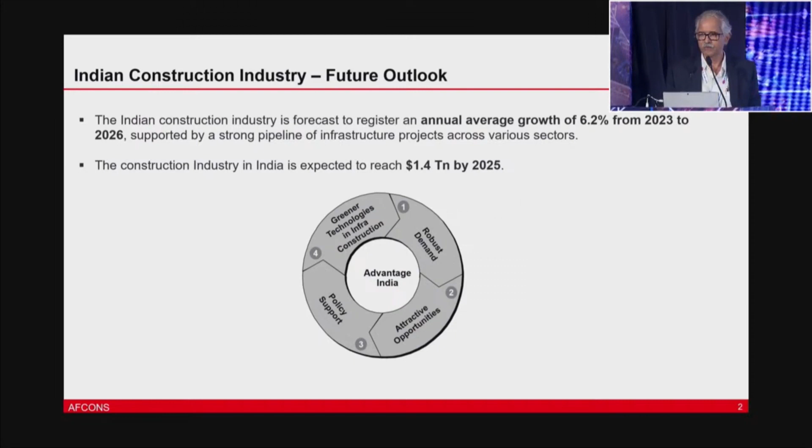What are the challenges of construction industries? First is project estimation itself. In our experience, government bids are coming so fast, and the window given is as short as possible, and you're supposed to respond in that. So estimation has to be accurate as well as speedy.

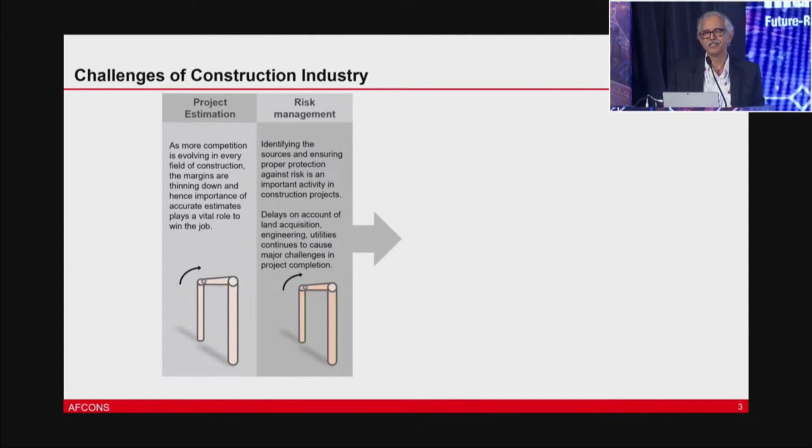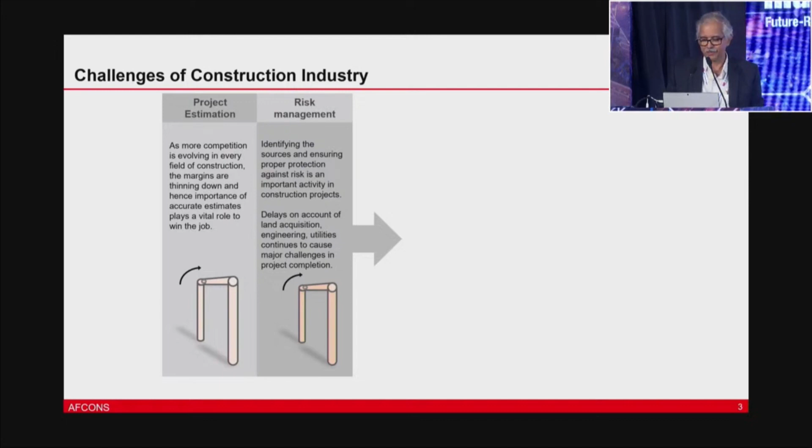There could be many risks, geographical risks. In India, I've seen that risk of land itself is not given, and clearance of the land is put on the contractor's head. Recently I saw one project, I don't want to name it, where clearance was given to us to do, and our people are struggling for the last one year. I don't know what the timeline was given in the detailed project report.

Resource management - all of us know it's the most important thing, and these days all construction companies, including real estate, face the same issue: labor is not available. Getting resources has become the most difficult thing for construction companies these days.

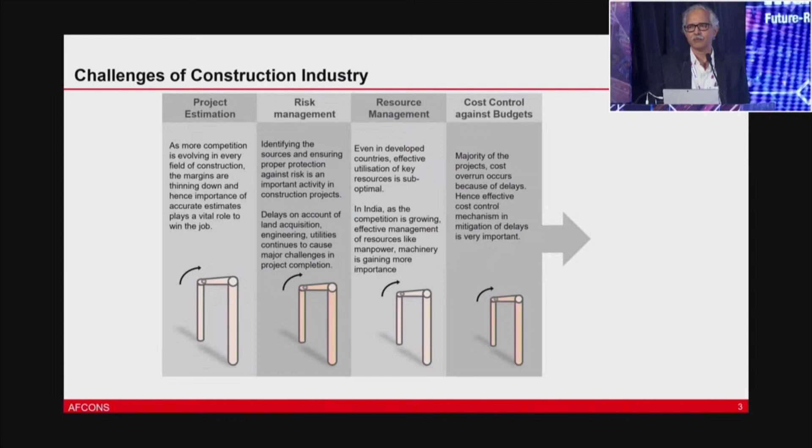Cost control against budgets - you have to be really on top of the budgets. I've been researching many construction companies, and to be frank, I have not come to a satisfactory answer, including AFCONS, on how you control your budgets. I would like to learn from international companies; although I've worked there, even there I'm afraid I haven't got a real answer on how we control budgets using software tools.

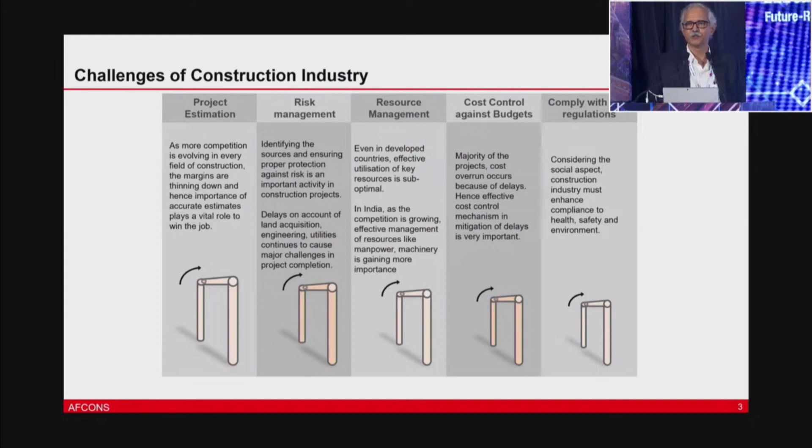I give this open challenge to discuss with me on this particular topic. Comply with HSE regulations - all of us are aware what kind of HSE regulations are there, and you have to comply with them. Most international companies I've seen first start their presentations with the fatalities of their own companies.

Anyway, to circumvent challenges in the construction industry, I came across this benchmark diagram for myself through McKinsey, where in 2016 a particular article was written emphasizing how BIM is going to play an important role, not for real estate but for infrastructure industry, and how BIM is connected with dotted or straight lines with all the systems in the organization, including ERP.

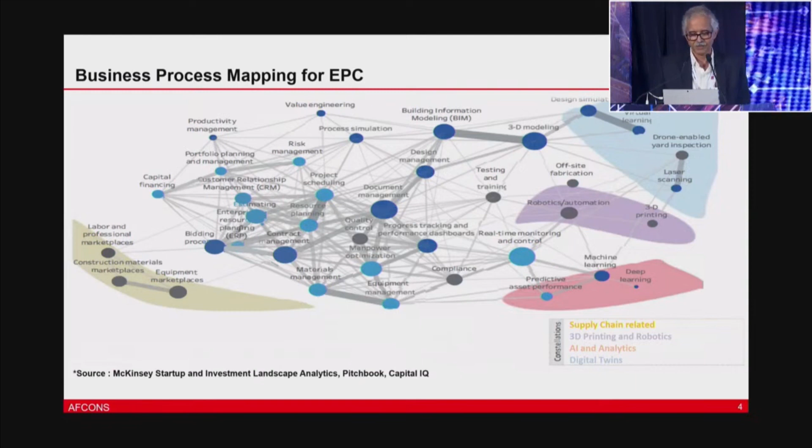We worked on this particular diagram for so many years - it took a very long time. We came up with our own support system as well as front-end systems for digitization, where we made SAP our main lifeline system for ERP. Now it is S/4HANA RISE.

And BIM - BIM is an initiative which started just about 1.5 years back, and we've now made it a way of working for the company, where a case study will be presented.

AFCONS won the MAKE Award for most innovative knowledge enterprise, winning the award for 7 consecutive years.

Second, we gave more emphasis on the cost control side, on IoT-based devices, where we put in more than 2,000 major equipments with IoT sensors primarily for governing our fuel theft. It's a case study of how fuel can be saved using our own call center established at Nagpur, and how they monitor using the sensors - that could be another case study for you to take up.

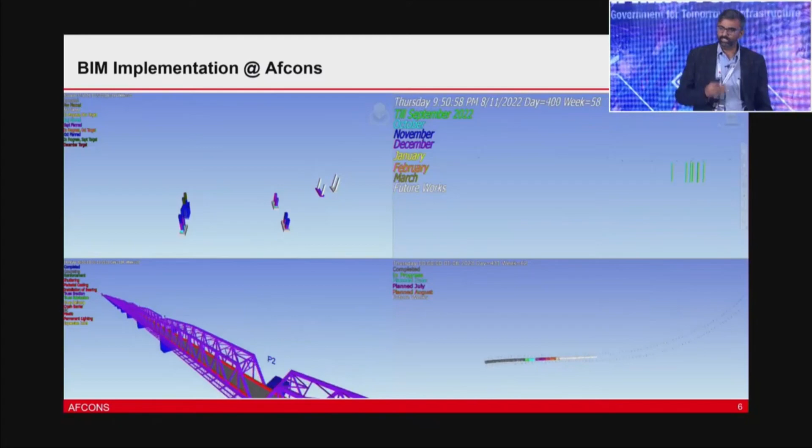So we are just showcasing 4 cases here in 4 quadrants. We are not talking about 2D to 3D, which is common, or 3D quantity extraction, or clash detection, which is a regular routine process.

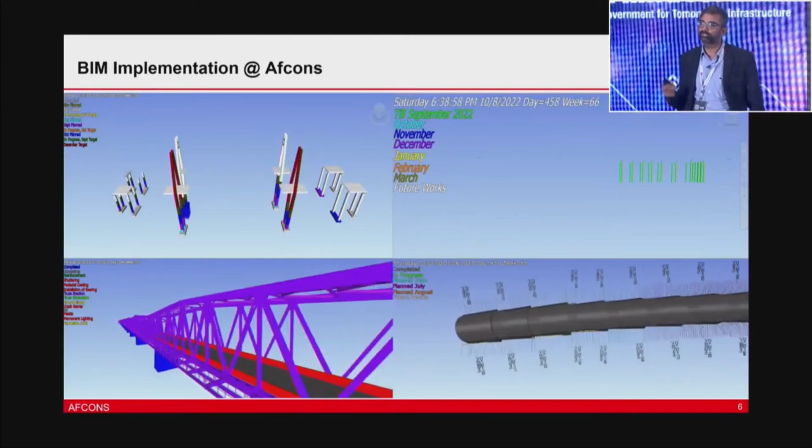We are focusing on decision-making processes plus contract administration. So from 4D, design analysis is being done. Then we go to the next level where construction methodology and method statement analysis is taken into account, lift wise, how the construction is going to happen, and validation of the construction method statement.

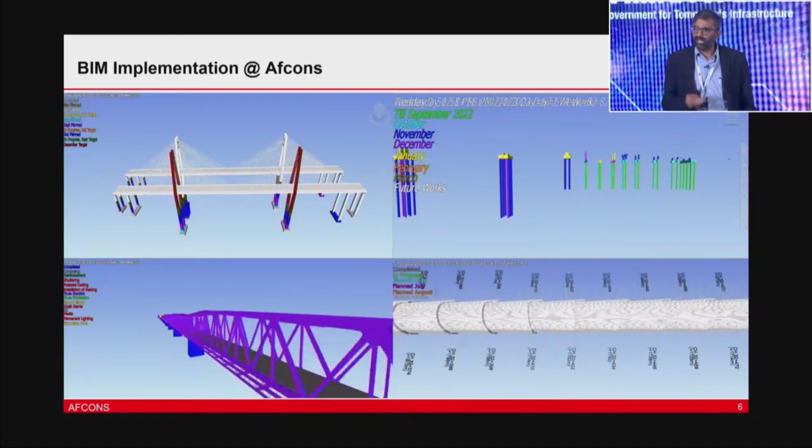Then the major focus is on progress monitoring and catching up on delays. In this particular section, what we are doing is the colors you are seeing are nothing but the realistic, dynamic, expected completion dates of those lifts of those pylons.

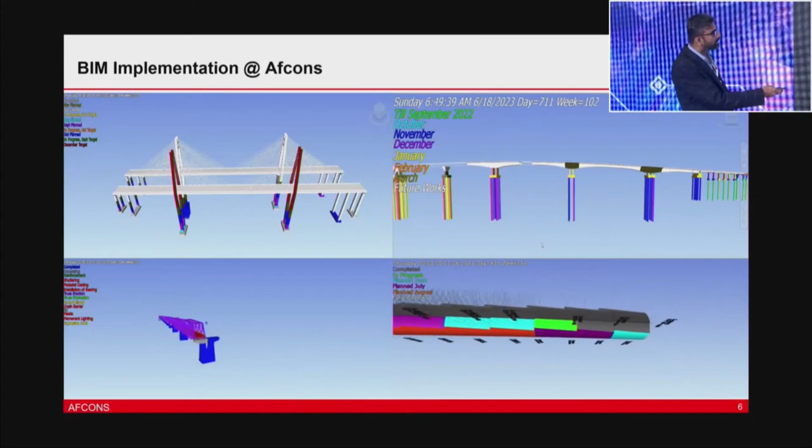You can see the months mentioned here. It's a 6-month look-ahead plan already being reflected on the screen. This is a Male project connecting 4 islands, worth around 4,000 crores.

You can see every segment, the way it's a balanced cantilever method being used here. The segments are being erected from one pier head to the other part, and the end portion is done by the truss part, which is being erected. Every segment is cast in the yard, ready to erect after 28 days, and then the erection is done, which is showcased here, with this portion done by the truss.

So when we go into progress monitoring, the construction methodology is already validated. There is no if-and-but situation at that particular point of time.

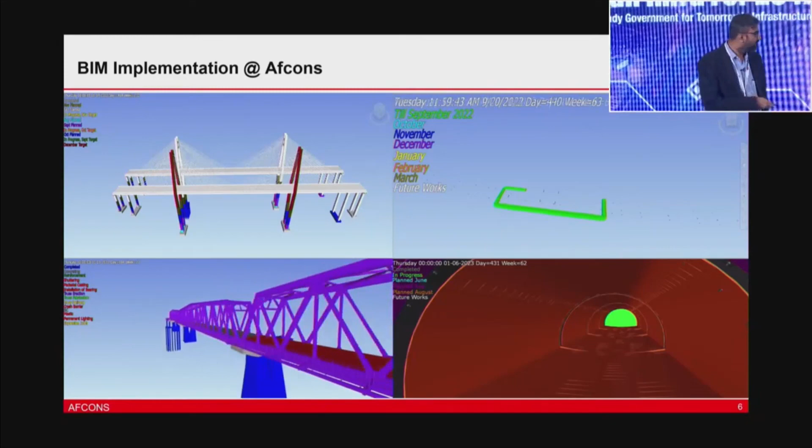Here MG Setu is the longest one, and you can see 2 different colors, yellow and green, which are nothing but the process mapping. This is the shortest and fastest delivery we have done, 1 month 10 days for such a long project, including complete modeling, complete creation of the schedule and marrying them together. I feel it's the fastest one which has been delivered and made live.

And here only, we could save around 20 days straight away within the span of 6 months. It's a good achievement as a first case study, which happened due to the complete support given by AFCONs, all the departments, plus we had done the value addition from our side towards the process.

So here, methodology, progress and the process—we are not leaving aside anything outside the BIM model or BIM environment, where the design is being tracked, fabrication, delivery, erection is being tracked, and the progress is being tracked along with the look-ahead plan.

So I don't need Primavera—it's in the back end definitely, but then everything happens digitally only, on such a huge project out here.

Here the important part is the pile is 100 meter depth and 2.6 meter diameter. Even if not shown, we have mapped the seabed also, so we know the friction pile is going 13 meters down the bed or 16 meters down the bed. Those kinds of additional things are done, and we are using this information for the anchoring of the barges for lifting the heavy segments.

This is a tunnel project wherein heading, benching, all the methodologies of the complete work are being monitored, and the fundamentals are kept the same for all the projects which I have presented here, talking about the 6 months look-ahead or 3 months look-ahead for decision making.

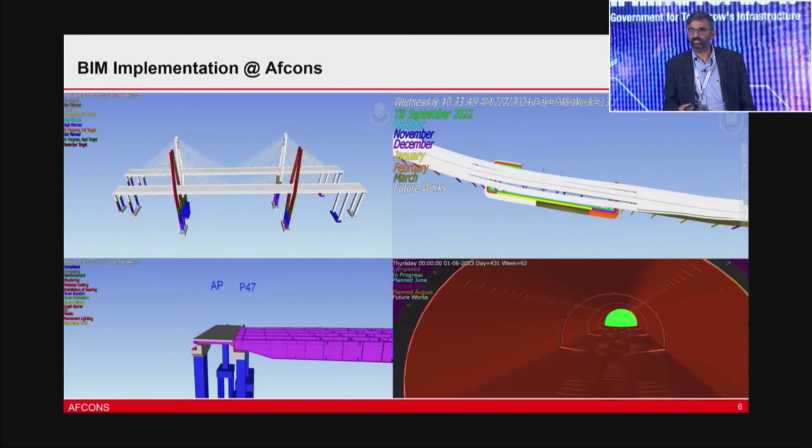At the same time, on the missing link viaduct 2 project, we have given the design coordinates also for every lift, so there is no chance of deviation on the installation of the formwork.

We have also done a 7D here, wherein the facility management data is being fitted in as a POC, which we are going to implement as a part of the process.

Most importantly, all of this has been reviewed for almost more than 6 months. All the projects are reviewed by the management on a monthly basis. On a fortnightly basis, we and the site discuss and come to a logical conclusion. And towards the end of it, whatever models you are seeing are fully loaded with the contractual information.

So tomorrow, if we go for any of the contractual matters, these are going to be the handy references for us, and this will be used by another stakeholder in the contracts department. So we are covering from design to method statement validation, to construction methodology, to progress monitoring, and then decision making in terms of contract administration.

So this is what we have been doing, and this is a dashboard which is being used successfully by the management, and now, as sir has mentioned, this has become the way of working in AFCONs. I think I'll hand it over to sir.

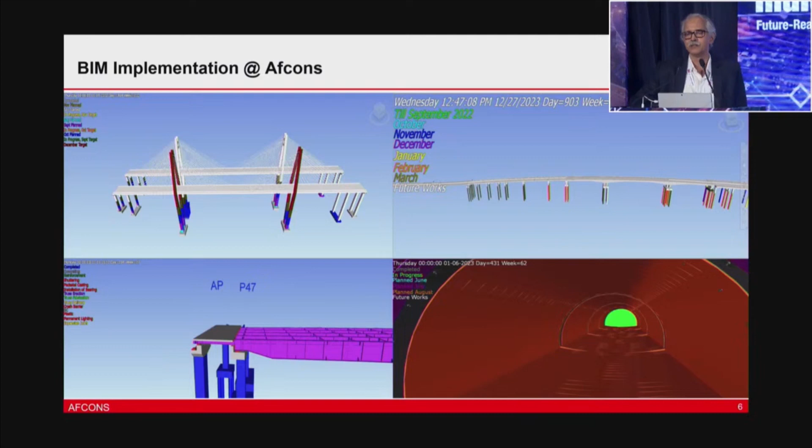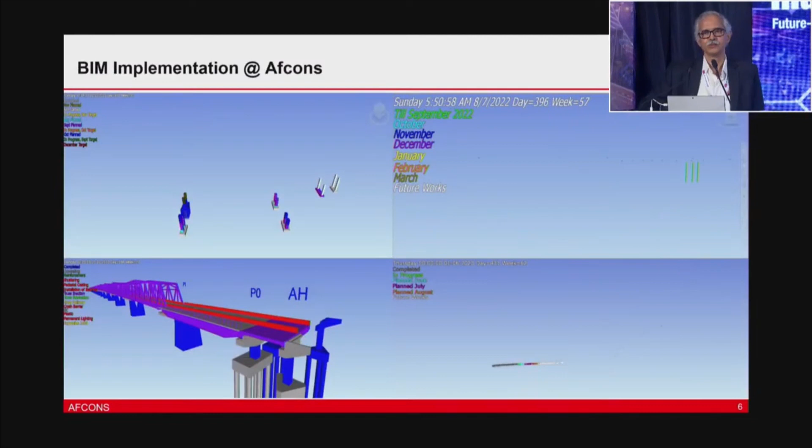Case study, the entire BIM journey started with MG Setu, where we told management that based on your Primavera schedule, the project was to get over by 31st of May. We gave you a challenge through our small AI ML simulation that you will complete this project in the first week of May. Everybody was laughing, saying you are challenging our own construction people. And really, the project was over by end of April.

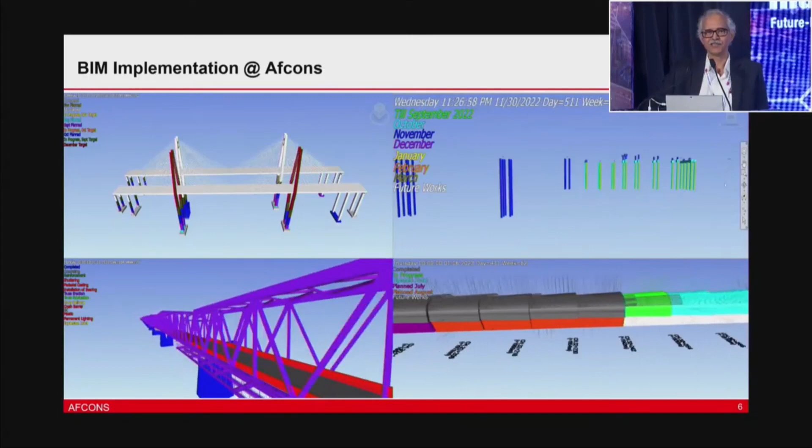So based on that, when it was presented to the Executive Vice Chairman, he said this looks much better than Primavera. Primavera is only understood by the planners, and sometimes it's not even understood by the planners. So we should go ahead with BIM. And this is how the BIM journey started.

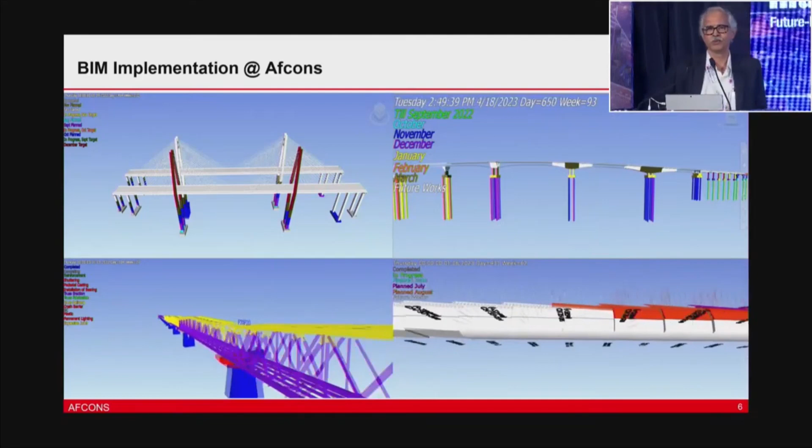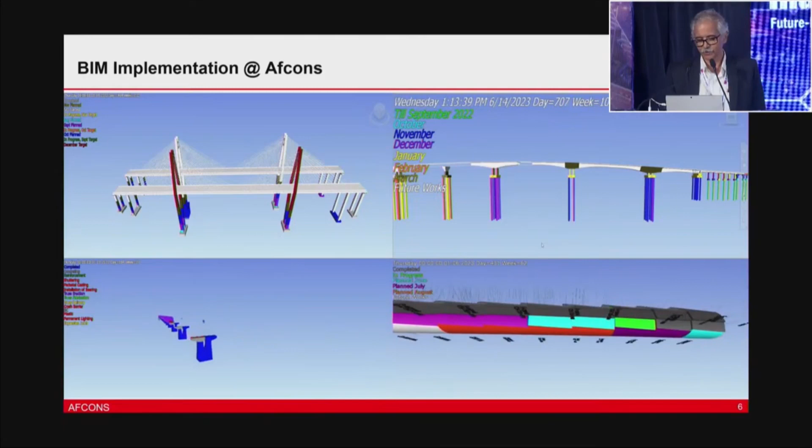Now with these four projects we have taken, after the success of this, we took Bangalore Elevated, Bangalore Metro, and Raghavpur Dam project. Now Raghavpur Dam project is yet to commence because we haven't been given the land yet, but I said you must start. So this is how the BIM journey happened in our company, AFCONs.

But if you look at some of the interesting projects of our country, like Atal Tunnel, the technology components were already there. This particular project, when we went to the site in 2010-11, it was difficult to reach even the site, and it was at 10,000 feet above sea level. I mean, implementing SAP, everybody said, Sandeep, you're joking. And we were with the Strabag joint venture.

But we made it because there was a challenge in terms of North Portal. We were given only 3 to 4 months of working. So if working itself is not happening, where is the question of SAP working there? But we took it as a challenge, and we made SAP work in 2016 or 2017, I don't remember. Atal Tunnel was successfully inaugurated by our Prime Minister.

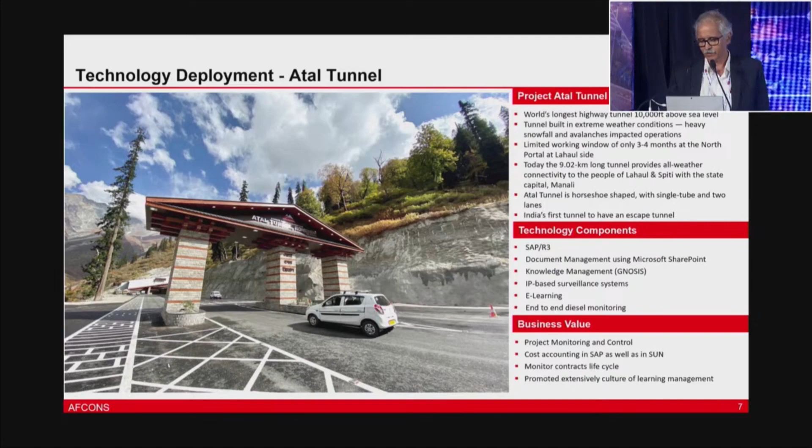So there we implemented a lot of technology components, which I don't want to name at this point of time. Chenab, one of the iconic projects of the country, was one of the first projects where the Tekla 3D model was used, and that was, according to me, the start of BIM.

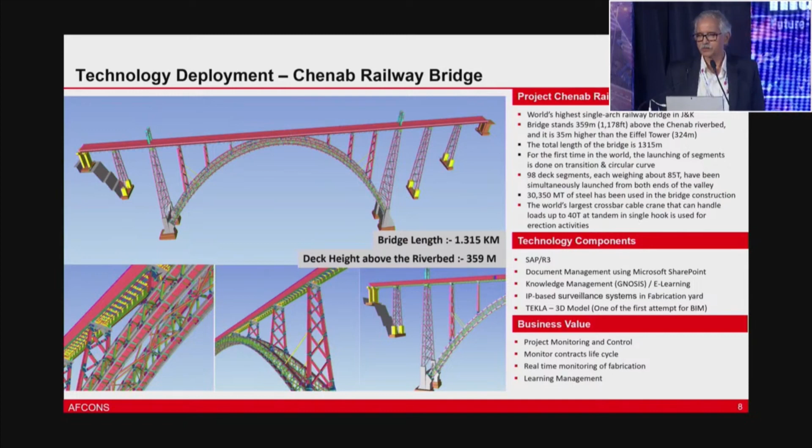MG Setu, in the real sense - sorry, I had written 5D here, my apologies - it was a 4D model, okay, but we used limited AI. So Tekla, Revit, P6, Navisworks, and SAP. SAP was used in a very, very limited way, just to track the cost component offline.

We used MG Setu first, and as he rightly said, we took only 1.5 months to complete the entire BIM model, which, according to me, is the fastest maybe in the country. I don't have any statistics about that.

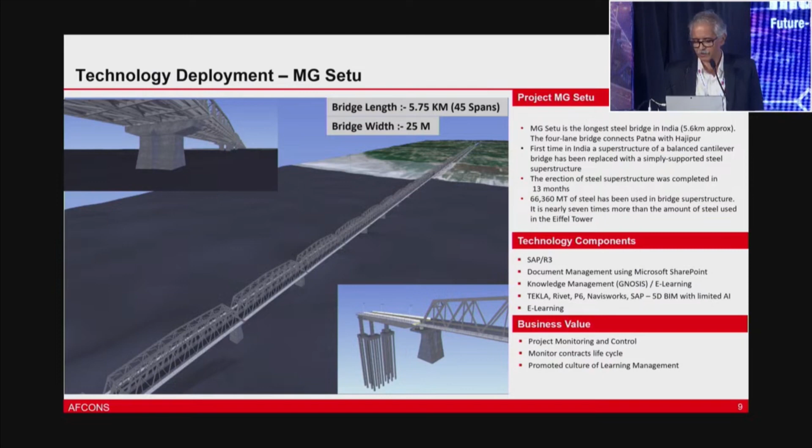Male, as he has demonstrated, is one which we have taken as a BIM project and it's running successfully. GCPL - this model, very surprisingly, was given by the client, and they didn't emphasize on BIM or anything. But what I could see in this particular model is they have given the model up to the fabrication level. And it was a completely end-to-end model.

So I was talking about why can't I get an end-to-end model either from the client or from the engineers. We were talking about the missing link - why there were really missing links in the BIM model. We went to the engineering consultant saying this particular string is missing, can you not develop it? They said, no, all that is not possible right now. So we should have an end-to-end model to get into the real BIM, and this is what is happening in GCPL, and we wish that the entire project till the end will be monitored using BIM, including fabrication.

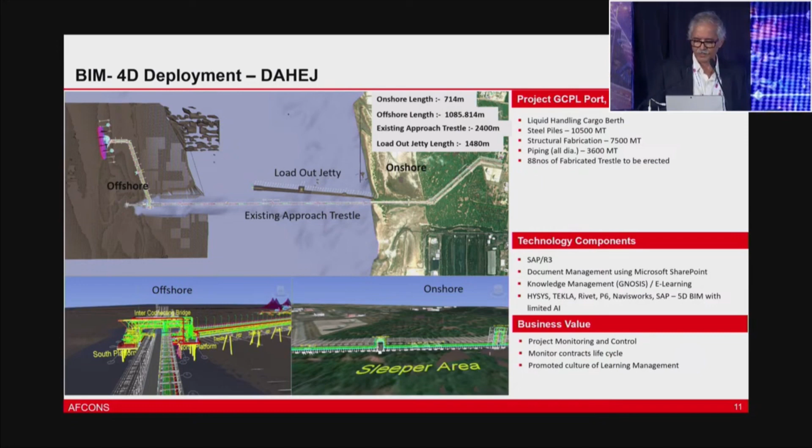So we used some products from oil and gas also, which is called HYSYS, from oil and gas. HYSYS is, I believe, from AVEVA.

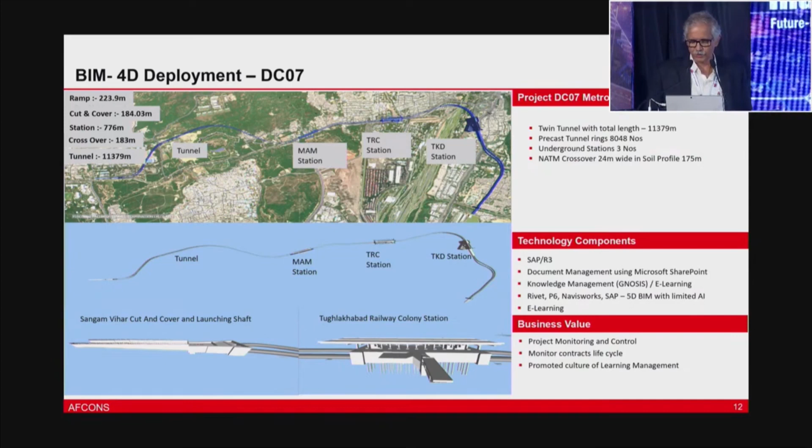DC7, which is in Delhi, which Swapnil is doing. Bilaspur, which will be connecting Chandigarh and Manali by rail, and it will boost our tourism. So that is being done using BIM.

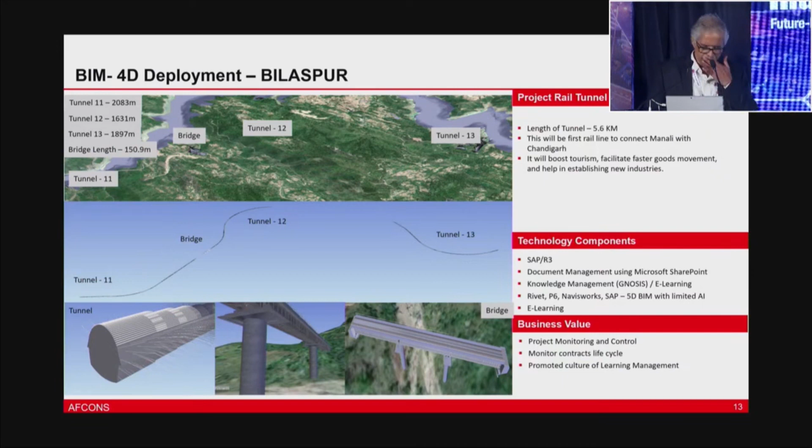So major takeaways from this particular, thank you. Sorry.

Major takeaways: we seriously want to make BIM as a way of working, effective use of IoT technologies. Learning and development is the answer to overcome workforce scarcity and optimize plant and machinery. And above all, works in the framework of strong and secured analytics.

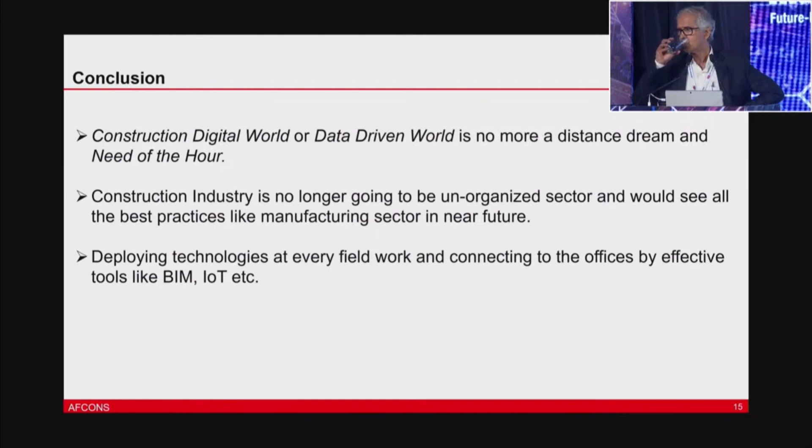So to summarize, construction digital world or data-driven world is no more a distant dream, it's the need of the hour. Construction industry is no longer going to be an unorganized sector, and would see all the best practices like manufacturing sectors in near future. Although I have written this statement, I will contradict my own statement. There is an infrastructure segment available with all of us called oil and gas.

If you look at oil and gas, the model is available from day one, made in HYSYS or any other platform, made meticulously. I have seen personally offshore platforms made in India with our own company meticulously. They use Primavera so meticulously, 26 to 50,000 activities are maintained in Primavera meticulously. And here, we all boast about maintaining 5,000 activities which are also not being monitored properly.